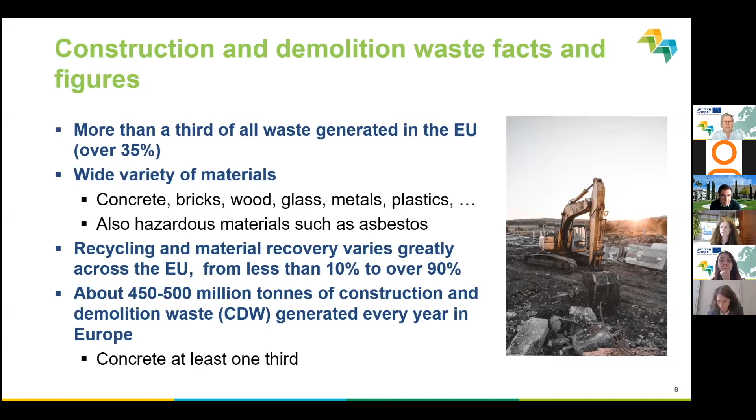You all know that the European Union is already focusing on this waste stream in the Waste Framework Directive, where, amongst others, there is a construction demolition waste management protocol and also guidelines on audits before demolitions. And of course, there's also the Circular Economy Action Plan, which is making a big point on this waste stream.

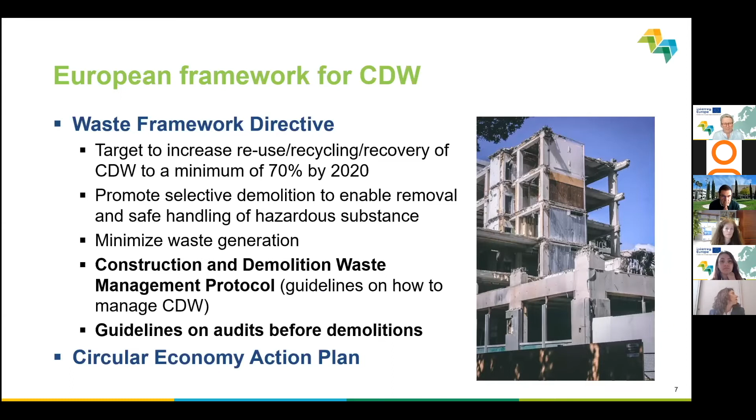So here today, we want to present you with some policy solutions on how you can tackle this waste stream. They're coming from the CIRCE project, CONDEREFF, and also Smart Waste. And we will look into all these different aspects such as collection, maybe tenders and incentives, quantities that can be estimated, and how the use of recycled construction materials can take place.

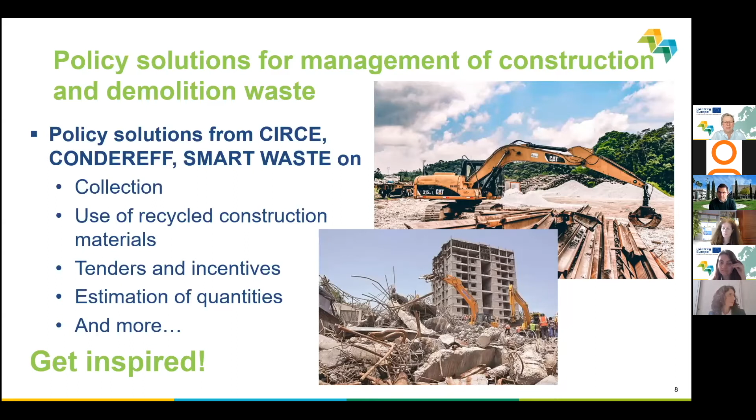So we hope that you will get inspired today with our webinar. We also hope that you have a lot of questions. And with this, I would like to go right away into our first keynote presentation.

We're really happy to have Jean Benoît with us here today. Jean Benoît, you will talk about improved resource efficiency through better policies for construction and demolition waste. We are really looking forward to hearing from you. The floor is yours, please go ahead.

Thanks a lot, Astrid, for the invitation, and thank you all for being here. I'm Jean Benoît from ACR Plus. I think now you can see my presentation.

So I will talk a bit about how to improve construction and demolition waste, and also to make it more circular, because I feel like the main message from my presentation will be to make construction and demolition waste management really part of a circular construction strategy.

A few words on ACR Plus. If you don't know us, we are the Association of Cities and Regions for Sustainable Resource Management. We've got about 100 members in 23 countries, and our members are mostly local and regional authorities, so cities, regions, also public utility companies, waste companies, but we also have other members. And we mostly do capacity building and facilitating the exchange of good practices among our members that share the same challenges.

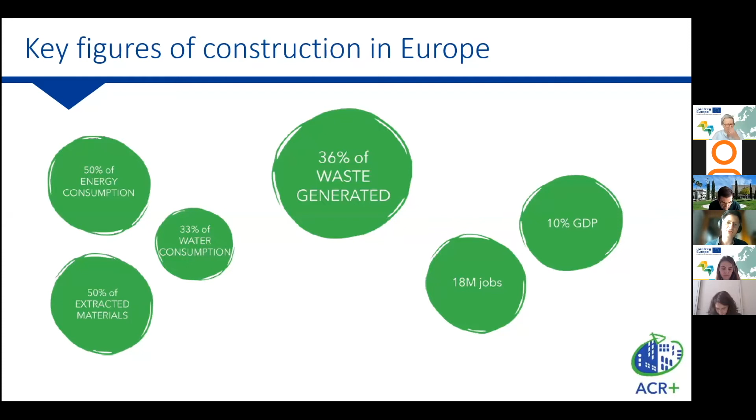We've been involved in several EU projects, some of them focusing on construction and demolition waste, and most of the stuff I will say today are from those projects. Astrid already shared some key figures on construction and demolition waste. This is one of the main, most significant waste fractions when you look at tonnage, but it's also a very important sector for Europe in terms of economy, in terms of jobs. It has also a huge impact in terms of resources, not only material resources, but also energy and water. And for us, it's a very important fraction because it's a very local resource that needs local and regional planning, so it's a fraction that our members are really interested in.

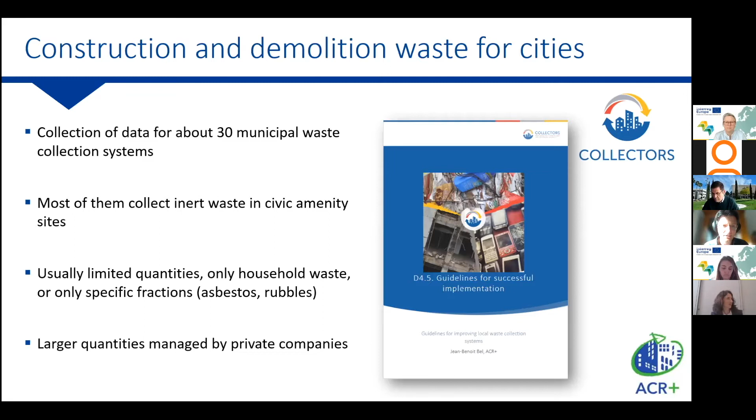We looked at construction and demolition waste at municipal level, what kind is managed together with municipal waste. Within the Collectors project, a Horizon 2020 project, we looked at good practices on waste collection and collected data in about 30 municipalities. We found that municipal construction and demolition waste is a very heterogeneous concept across Europe: some cities take responsibility for commercial waste too, while others limit the quantity managed in civic amenity sites, or focus on key hazardous fractions such as asbestos. Usually this waste fraction is mostly managed by private companies, but cities have a big role in planning and making this waste management part of a circular construction strategy.

In Collectors, we looked at two case studies organized at local level by cities. The first is Reimerswaal in the Netherlands, where they started collecting clean gypsum at civic amenity sites to engage in closed-loop recycling. They put a strong focus on quality, because without the right quality you can't achieve closed-loop recycling. The driver behind this good practice, as in many waste practices, is a tax or ban on landfilling of gypsum, making it interesting to sort. Overall the collection system has a positive economic balance, despite needing to transport the gypsum far away to be recycled, mostly because of savings on landfilling.

The second case is quite interesting, from one of our members in Odense, Denmark, a city in the middle of the country. They have a very well organized network of civic amenity sites, and whenever they find a new innovative recycling route, they open a new container to collect that waste and provide it to recyclers. Here they organize the collection of bricks at civic amenity sites to be reused by a local company, which takes the bricks, cleans them, prepares them, and uses them again as new materials.

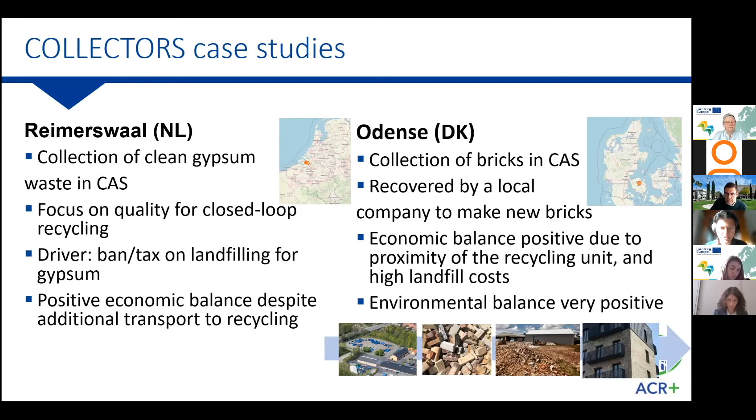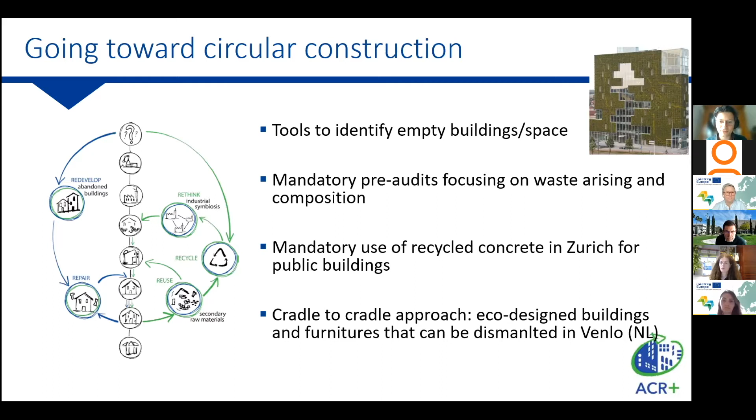In Zurich, they've made mandatory use of recycled concrete for public buildings, a standard also for other recycled materials. You can see on the top right of the screen the city hall in Venlo, Netherlands, where they had a very integrated cradle-to-cradle approach. They eco-designed the building completely, so every element could be dismantled, not only the building but down to the furniture, the chair, the table. They can all be dismantled and repurposed or recycled at the end of their life.

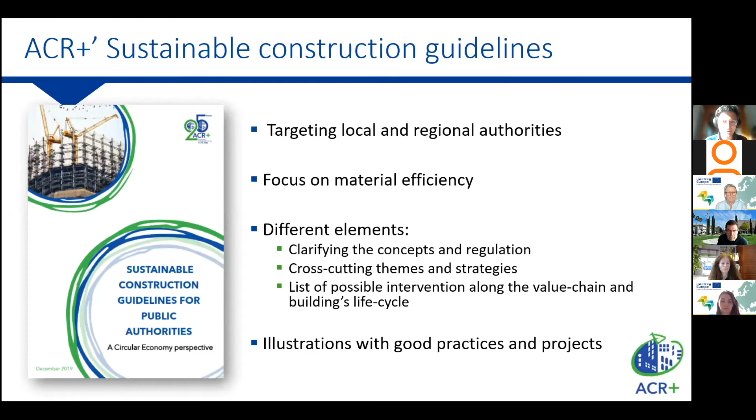Well, that's it for the presentation. Didn't want to take too much time from the other speakers, but I will be happy to follow the rest of the presentations and answer your questions if you have any. Thank you very much.

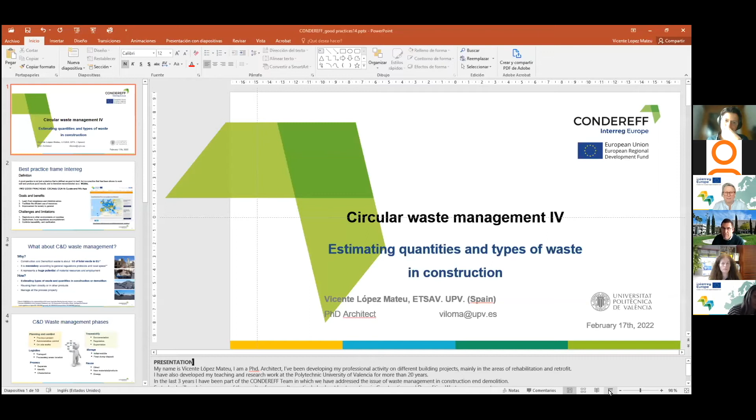Hello, good afternoon to everybody. My name is Vicente López. I'm an architect, a teacher at the UPV, Polytechnic University of Valencia. The background is a picture of my university.

I've been developing my professional activity for about 20 years, also research about waste management and rehabilitation and retrofit of buildings. In the last 3 years I am part of the CONDEREFF team, and I will explain two best practices we have identified in our region. Finally, I'm very grateful that you have invited us to share these experiences with all of you.

Thank you very much. Well, first of all, we can talk about the best practices you have introduced in the video and in the previous presentation. They are like a model, but you have benefits, and on the other hand, you have some challenges or limitations. I will try to explain the two good practices, and the possibility to reproduce or implement them in your local environment or country.

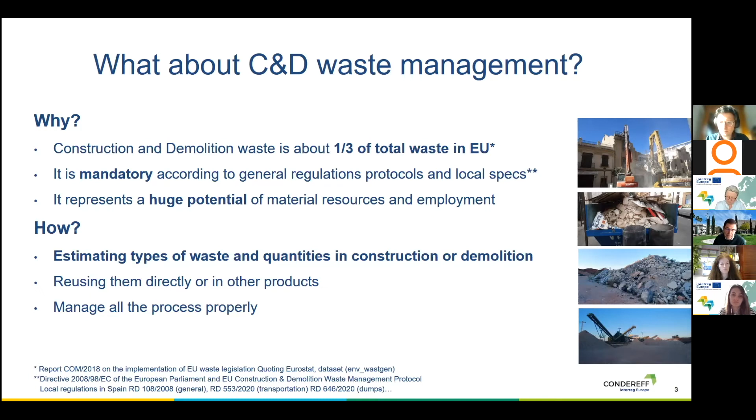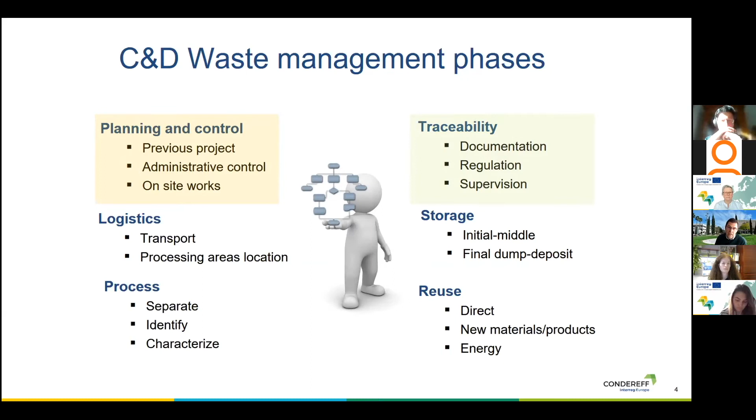Talking about the first good practice, it's about the ratios or rates. We can talk about rates of waste that are generated in these operations or tasks of demolition or new buildings, or even retrofit or rehabilitation.

So the study has started knowing or studying from the different companies that trade the waste, and even from the dumps, the real values that have obtained, and they have compared in these different areas the amount or the quantity of the different waste produced.

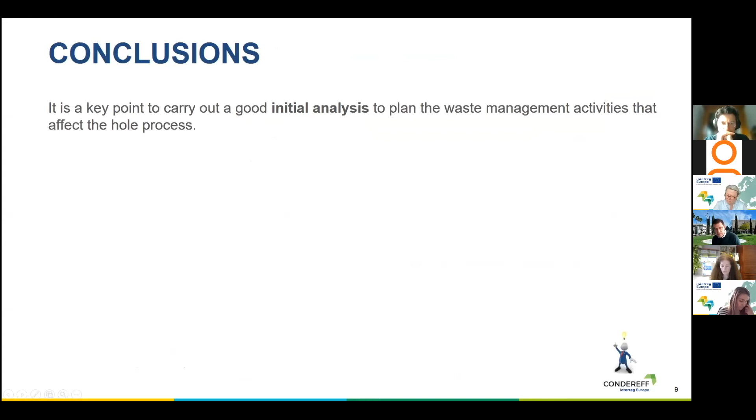The conclusions of this presentation are that it's a very important key point to have a good initial analysis in waste management. The second one, we need this kind of tools to manage properly because it's a very complex task.

And finally, they help to estimate the amount of different waste more accurately and how to manage them. The diffusion to local authorities facilitates the spread and knowledge of applications, and this is the first step to establish better control and administrative monitoring of the whole process.

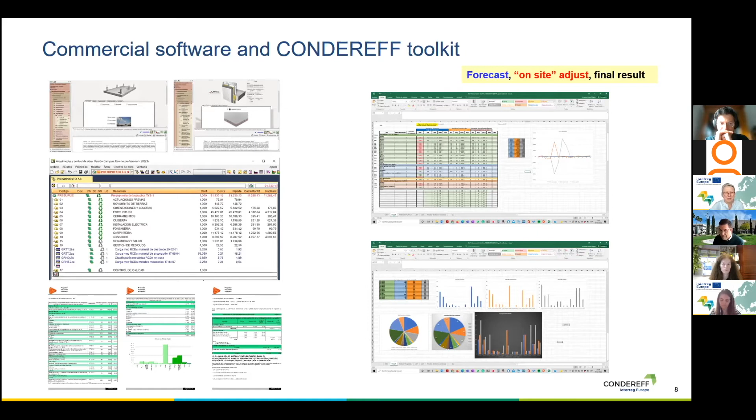Very briefly, yes. The issue is that we have very different local regulations, but we have compared all of them and try to unify, because otherwise it's like taking different data and it's very confusing, it's not real. Sometimes the information comes from the past or previous studies, and construction has changed and is changing now, so probably you don't get the real information from the dumps and from the companies that manage these elements.

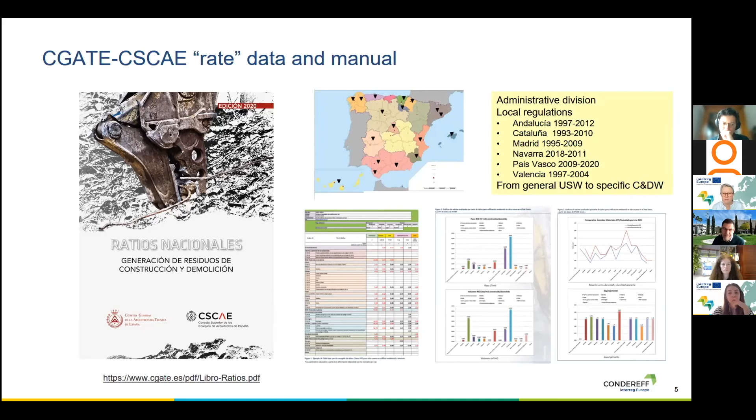Absolutely, well thank you very much. We have a question from Brigitte Wixner, who says first of all thank you, and have you considered how to link the collected waste to the materials identified in the project, and materials in production where there is a share of recycled materials as stated, meaning the circularity?

Yes, this is the second phase of our toolkit. We are now studying how to manage previously the amount of waste, and secondly, to connect with the reuse of these materials.

Thank you, Vicente, very good to hear that as well. We have several people posting interesting information. Andy Rees says in Wales they commission every 5 to 6 years a construction and demolition waste survey, and you have access to the survey in the chat, so please look at it. I would also be grateful to the people posting their interesting projects - I've seen City Loop, LIFE IP, and Econ4SD projects - if you can also post the links in the chat so we can access them, that would be great. And if you have questions, please don't hesitate to ask them in the chat.

I would like to say thank you very much to Vicente for his explanations, so we understand better what is in this waste and how it can be reused. Thank you very much, and we would like to go to the next presentation.

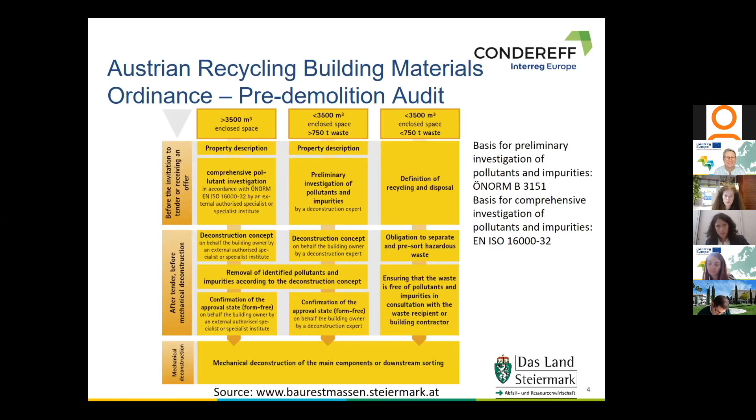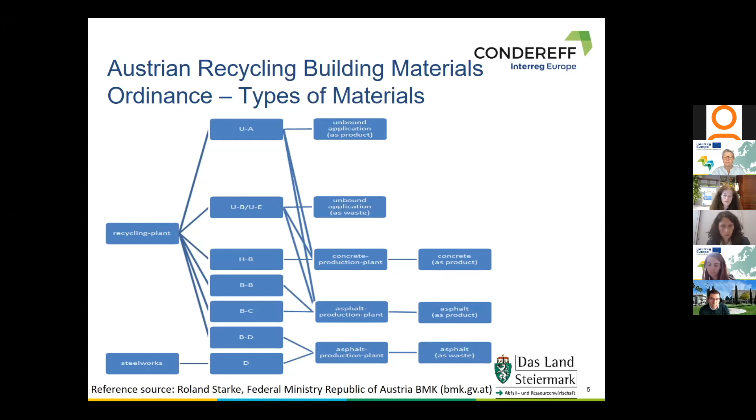So what did we learn so far from the implementation of this ordinance? First, the pre-demolition audits and high quality standards are crucial. Second, the input quality for recycling building materials could be significantly improved since introducing this ordinance, and a clear sign of this is that most recycling aggregates are declared as the highest quality, this U-A class, which reaches the end of waste.

Furthermore, we could significantly improve the recycling rate for C&D waste. It is well over 80%. It's assessed every year in Austria, and the last available data shows a recycling rate of 82%, but in previous years it reached up to 88%, so it's a rather high recycling rate.

But not everything is that good. We can also see that the lowest recycling rates occur in areas where landfilling costs are comparatively low. In practice, it also became apparent that it can be difficult to identify certain hazardous substances during these pre-demolition audits. And for some materials, there are still no relevant recycling loops established so far, for instance for gypsum or mineral fibers. But the already planned landfill bans will probably build pressure in the right direction.